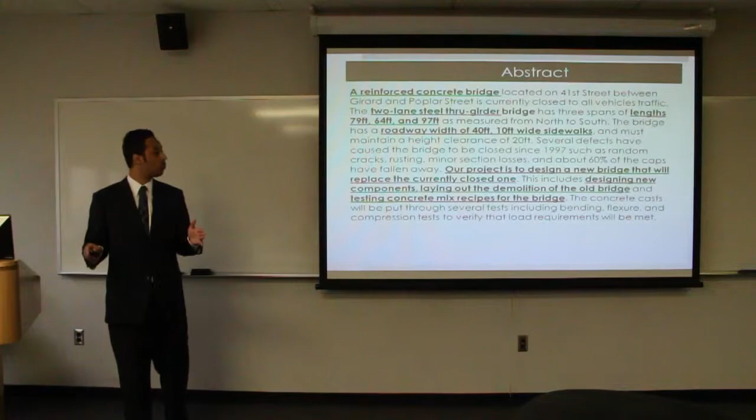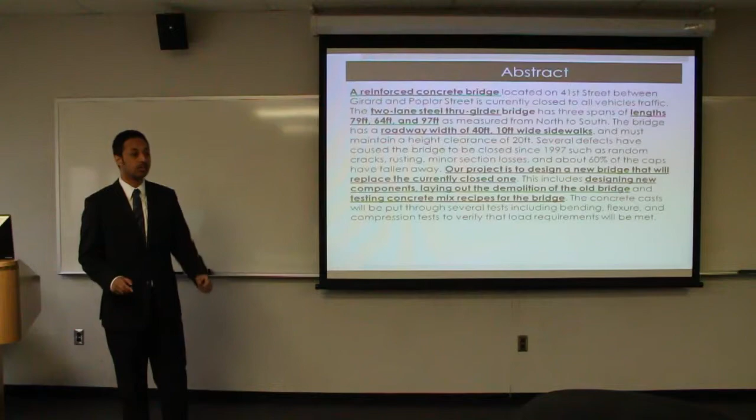The bridge consists of 3 spans, 79 feet, 64 feet, and 97 feet as measured from north to south. The roadway width is 40 feet with 10 feet at each side as sidewalks, and the vertical clearance is 20 feet.

Our overall objective is to prepare a complete design that will be used to replace the current bridge. The design will include designing the different parts of the bridge, designing a rainfall runoff model, preparing concrete recipes, and testing them to meet the specifications required, and testing our model when we apply the various loads acting on it to see if it can withstand them.

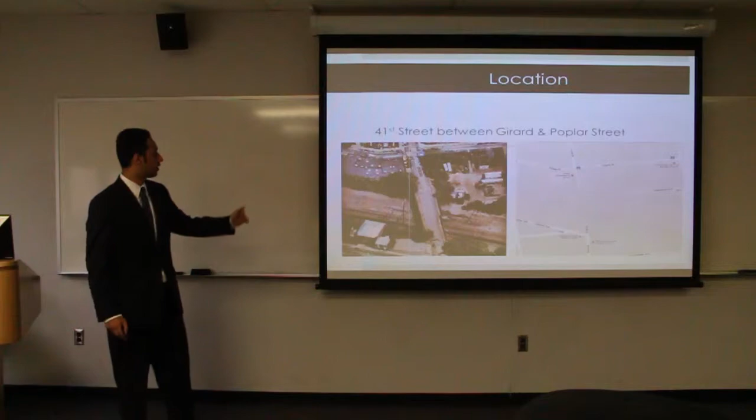And here, as you can see, an overview of our bridge.

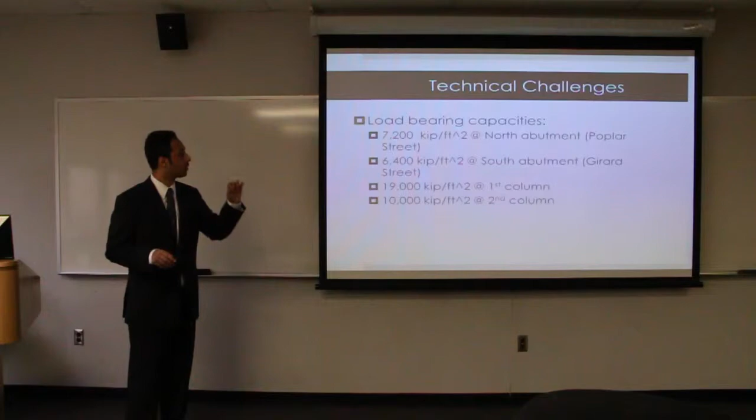Before designing, we had many challenges. One of the most important challenges we faced was the soil load bearing capacity. This is crucial since it indicates the weight of the bridge and the amount of settling of the soil. The current site of the bridge doesn't have any settling, meaning that the soil and the foundation were able to hold the weight of the bridge. So when we were designing our bridge, we had to stay with the same weight properties of the current bridge.

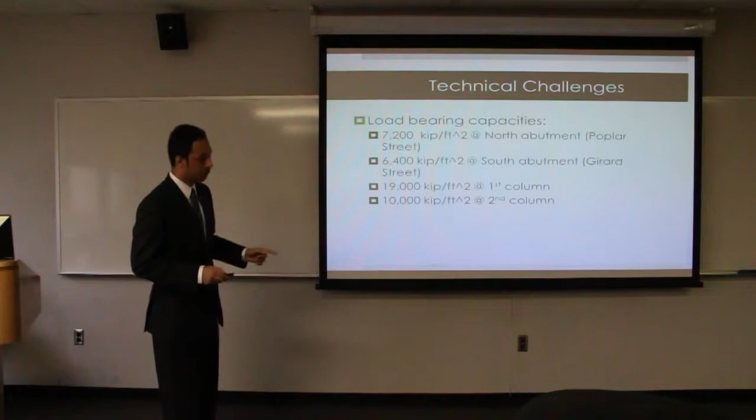As you can see here, these are the capacities at the north abutment, south abutment, first column and second column. One more technical challenge we have to face is to communicate with different companies, as there are utilities running down the bridge — companies such as Philadelphia Gas Works, Philadelphia Water Department, Philadelphia Electric Company, SEPTA, Amtrak, and PECO. For SEPTA and Amtrak, we'll ask them to detour their railroad which runs under the bridge, and for the rest of the companies, we might ask them to shut down their services just during the construction phase for safety purposes.

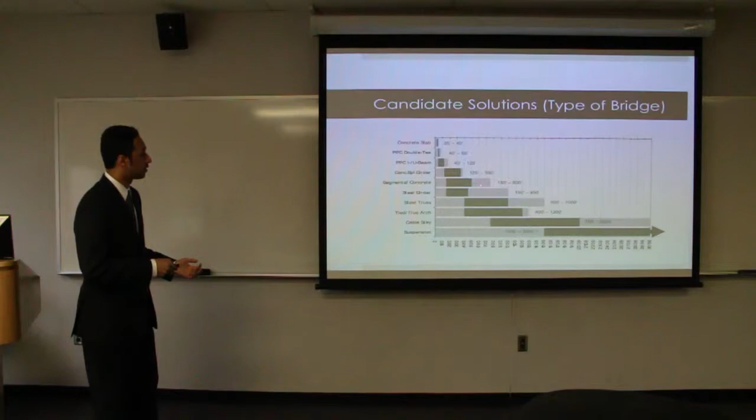When we started designing, we had to decide 2 things: the type of our bridge and the construction method. As you can see here, this figure shows the different bridge types depending on the horizontal length of the bridge. As our project is 240 feet long, our bridge falls between a girder type of bridge and a segmental bridge, as girder ranges from 125 feet to 350 feet, and segmental ranges from 150 feet to 500 feet. Here's a comparison between girder and segmental types of bridges.

Girder bridges are simply bridges that have girders on top of the abutment and the piers with slabs that cover the entire surface, while segmental bridges are made from small sections. Each section is constructed at a time, and when completed they form a whole bridge.

Comparing advantages between girder and segmental: girder can be made using concrete or steel, components can be fabricated, slabs can be replaced without much difficulty, and design can be easily modified. The problem with this type of bridge is that if long spans are used, deep sections will be needed. For segmental, it has high durability, stands for many years before needing extensive maintenance, and it's optimal for bridges with long spans.

For our construction methods, we had to compare between two methods: precast concrete and on-site concrete. With precast concrete, the parts will be constructed in a plant and transported to the site, while with on-site casting, the concrete will be mixed and proportioned off-site and transported to the site by cement trucks.

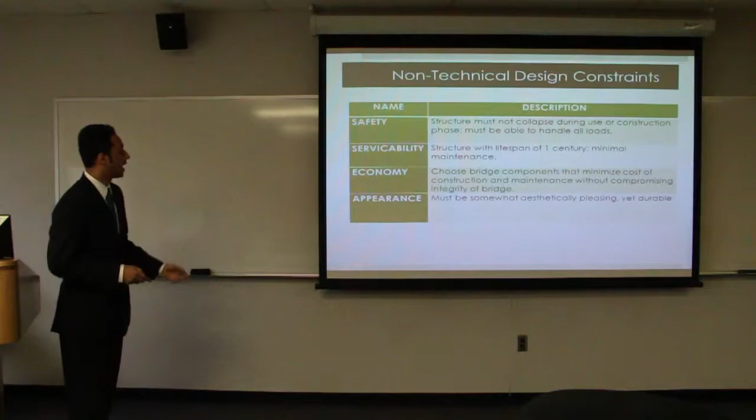Here are our non-technical design constraints: safety, serviceability, economy, and appearance. In designing, we have to consider the span length to depth ratio, as it helps us control the deflection.

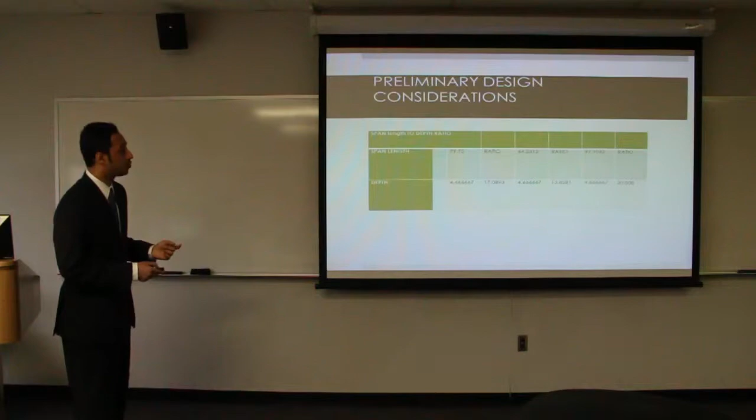Here is our bridge design deck. There are 3 types of reinforced concrete bridge decks: solid slab, void slab, and beam and slab. For our design, we're going to use void slab and beam and slab.

Here is the design of reinforcement. We have the compressive strength, which is 4,000 psi, and yield strength, which is 60,000 psi. We got the dead load, live load, and wind load from our STAAD.Pro analysis.

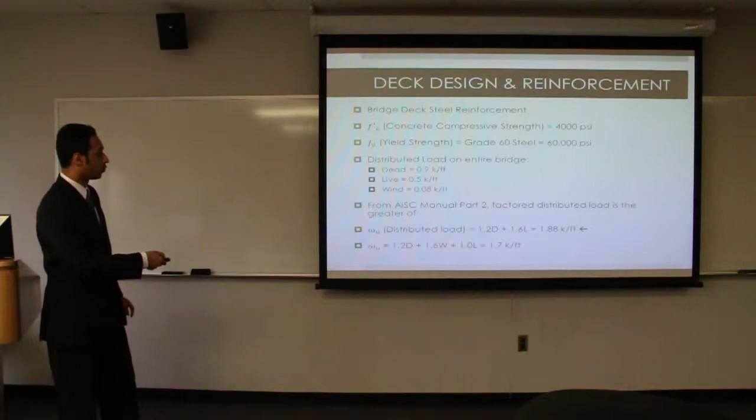Here is the distributed load formula from the AISC. First, we used the formula with dead load and live load, and we got 1.88 kips per feet. Then for the second equation, we added wind load, and we got 1.7.

For the first span, we have here the formula of the factored design moment. We pretty much have all the variables we need: this is length, and this is the factored load, and we got that number over there.

Here we have this equation with all the variables from the previous calculations, including the resistance factor, which was 0.9, and we're left with BD squared equal to almost 22,000.

So we tried B to be 20 inches, and that gives us D of 33 inches. Then we got the area of steel, which is 11.22 square inches. So we tried 3 number 18 bars with an area of steel of 12, and a beam width of 15.4 inches.

Then we check. In design, it's usually assume, try, then check. In our calculations, we didn't get this design the first time — we had to try and check if it would work or not.

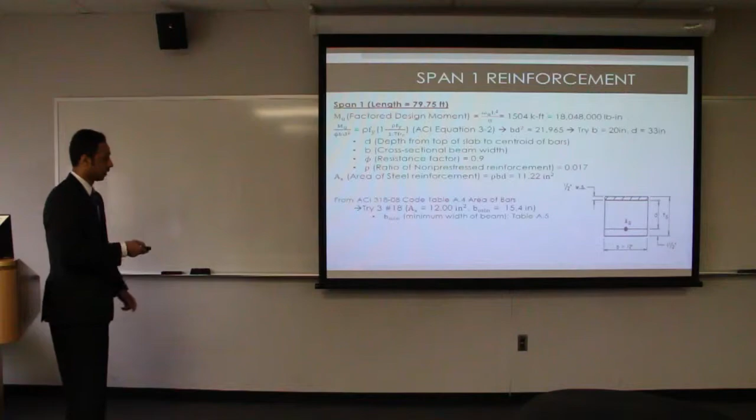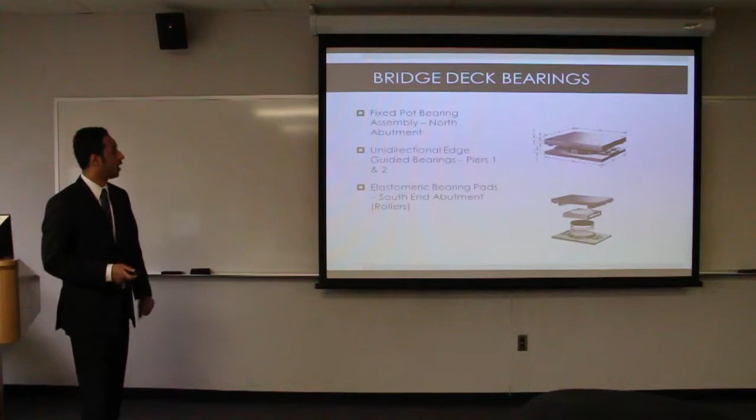The same thing applies to span 2 and span 3, using the same formulas. For bearings, bridges are not static, so parts of the bridge can move as the temperature goes up or down. To control that movement, because it causes many problems if not controlled, we use bearings.

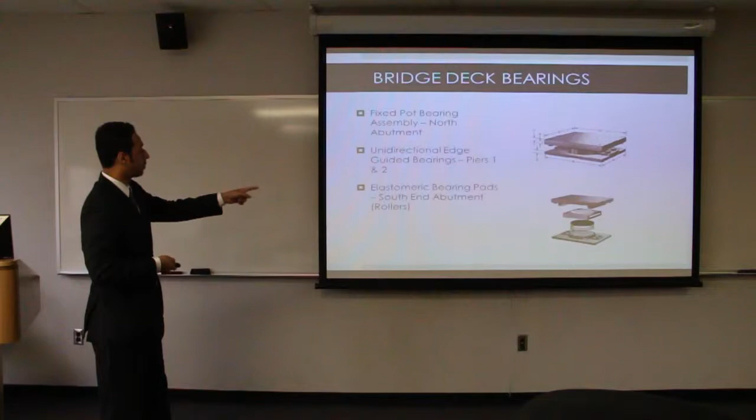There are 2 kinds of bearings: fixed bearings and expansion bearings. Fixed bearing holds the members in place, and expansion bearing allows or permits some movement. Here we're using a fixed pot bearing for the north abutment, guided bearing for piers 1 and 2, and elastomeric bearing for the south abutment.

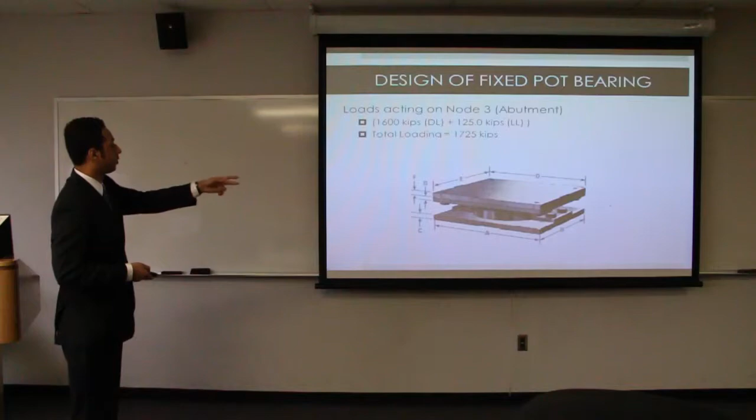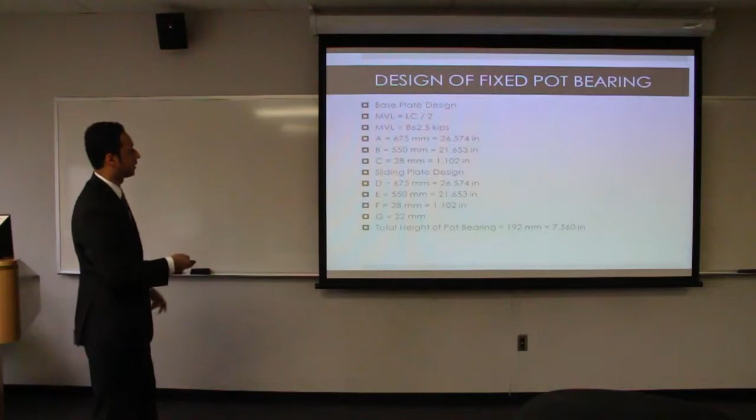Here we have the design of the bearings. We have the load, which we get from our STAAD.Pro analysis, and here we have the maximum vertical load, which is the forces divided by 2, and then we had all these dimensions here, as you can see, A, B, C, and also for this sliding plate. Also here for guided bearings, it's the same kind of process, and also for the elastomeric bearing.

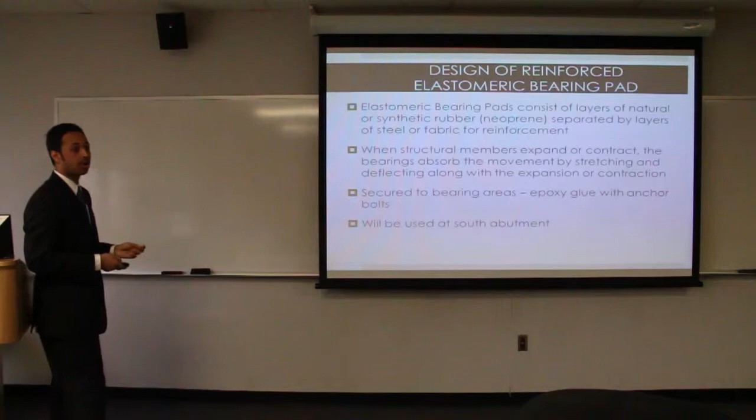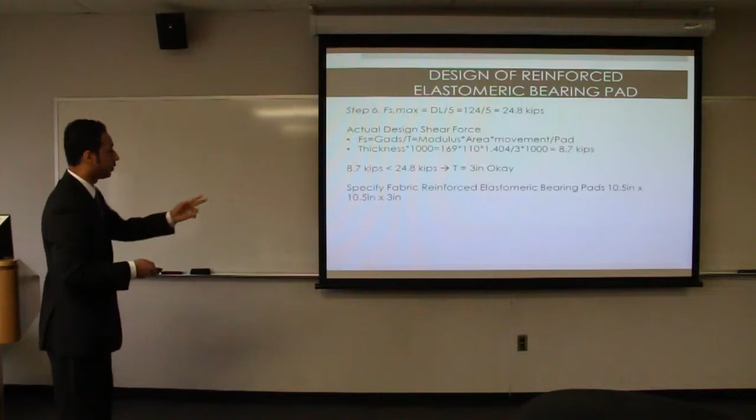We went through 6 steps to design our elastomeric bearing, and we got 10.5 inches by 10.5 by 3 inches.

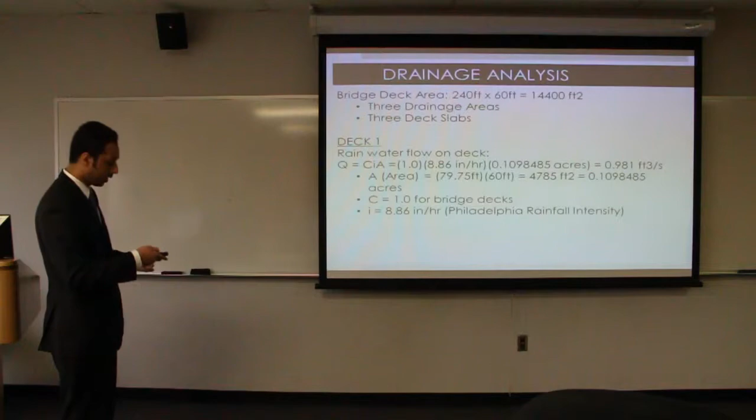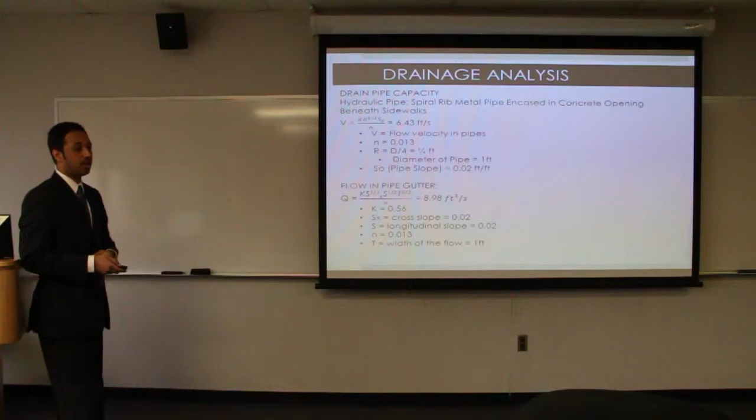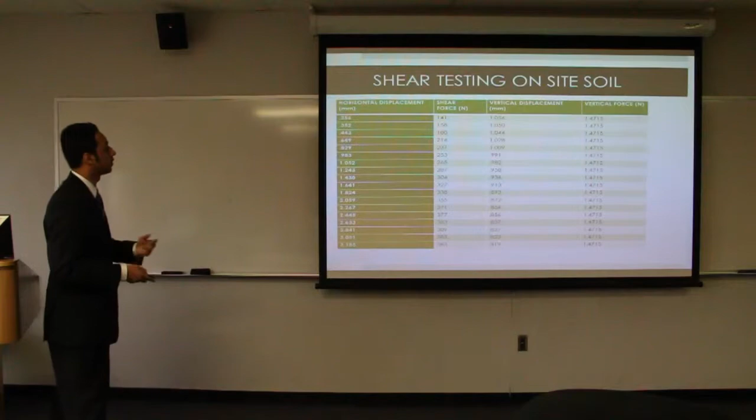Here's our drainage analysis. We used the rational formula for the 3 decks, and we got the grate inlet drainage and pipe inlet, which was greater than the flow rate, so our design passed. And here is the soil test, as we talked about it, that there was no settling, so it was okay.

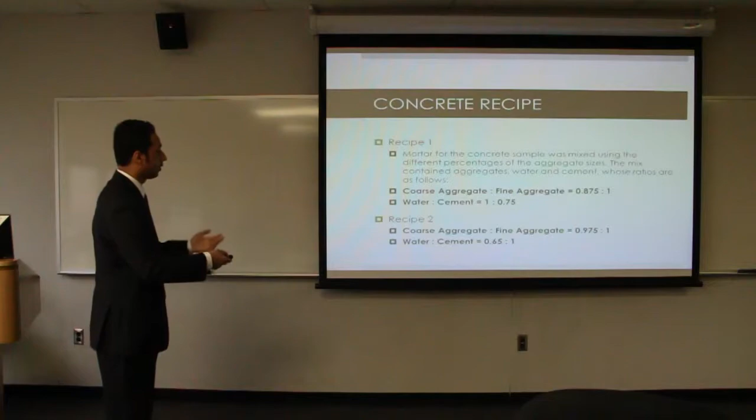We created two recipes with two different ratios, coarse aggregate to fine aggregate ratio and water to cement ratio. We did a 3-day test for the first recipe, and it didn't pass as it was less than 4,000 psi. For the second recipe, we did a 28-day test, and the compressive strength was over 4,000, so it passed.

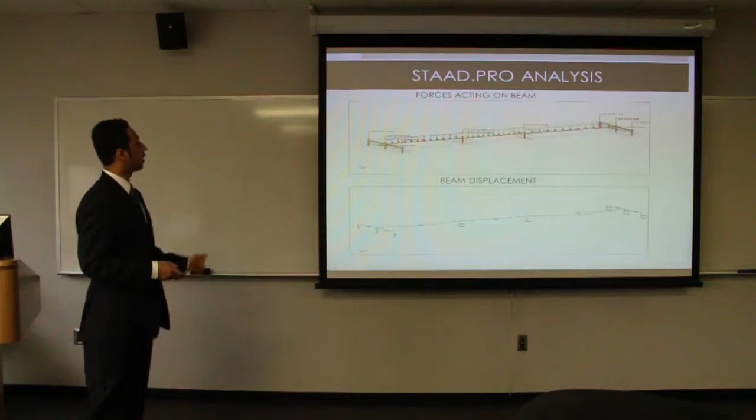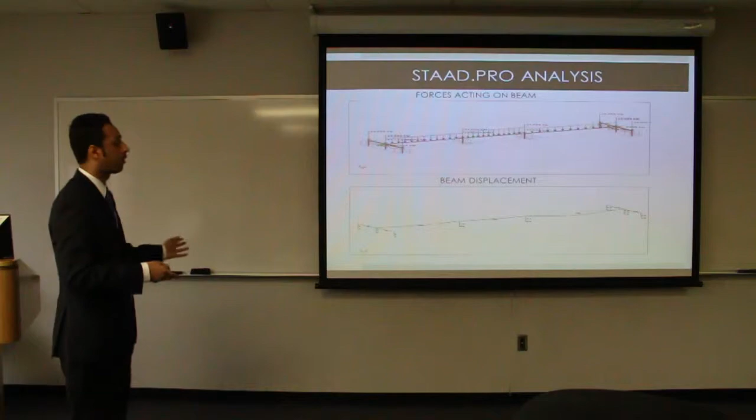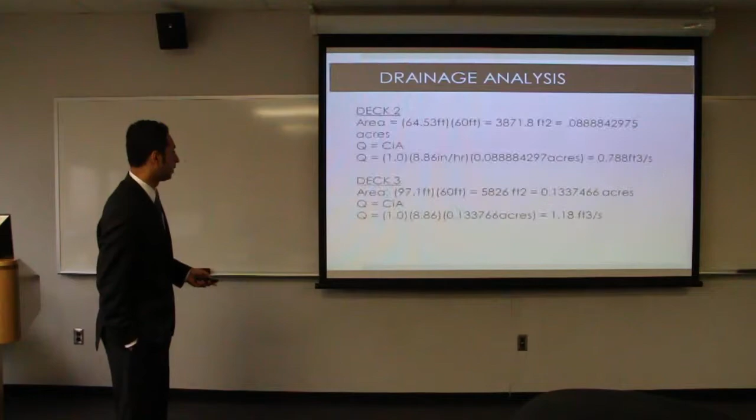Questions? Could you go back to the slide where you showed the allowable load on the beam? I think it was 3 tons. It was at the beginning somewhere, in the constraints. Now, it says maximum vehicle load of 3 tons.

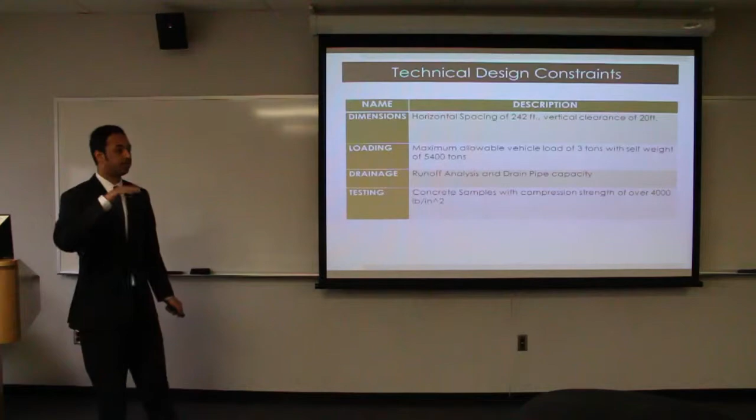That means the heaviest vehicle that can go on the bridge weighs 3 tons. No, it's the peak load of the vehicle on top of the bridge, that's what the city of Philadelphia has specified, that the bridge should withstand the peak of vehicles on top. Yeah, but you're saying the vehicle weighs 3 tons. I'm sorry, it's not the vehicle, it's the total vehicle weight. What I'm thinking is that's the weight they put on a bridge that is in bad condition. It's a limit, a load limit on a bridge, 3 tons for any vehicle. The city of Philadelphia has specified a limit to the load on top of the bridges. Okay, just wanted to verify. Yeah, that's fine. Other questions?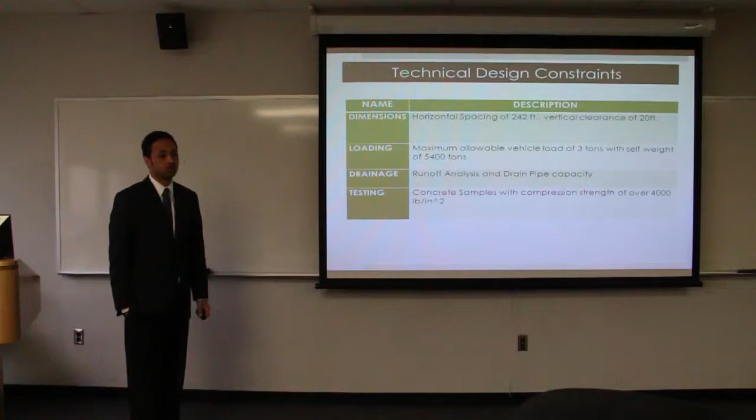When you were talking about cast on site versus precast, why would anybody ever use cast on site? Looking at your assessment, is there any reason you would ever cast on site? The way we created this slide is a comparison between precast and on-site casting, not all the advantages of on-site casting. We just compared each method's advantages against the other, not showing all advantages of both methods.

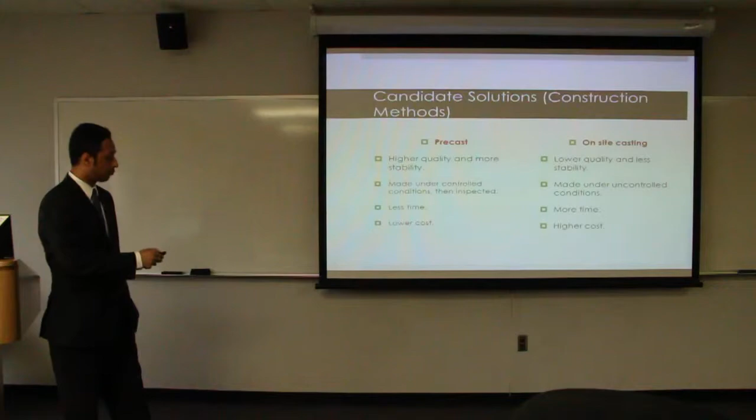But can you give me an example of when you might choose on-site casting? Probably if shortening the time isn't necessary, and for larger bridges, since precast concrete takes less time and is better suited for smaller spans. On-site casting concrete is better for large bridges. Because if you want to create components of a very large bridge, no one would do it in a plant, so it should be created on-site.

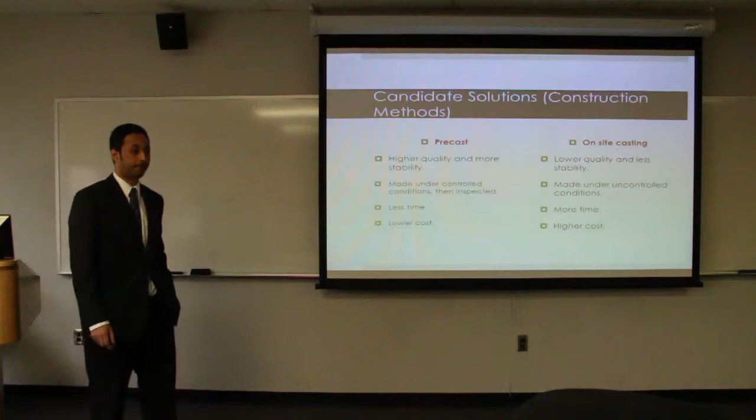And one other question on the slabs, since you talked about a void slab and a beam slab. There are three types: solid, voided, and beam and slab. Can you explain the difference between those three? In our design, we only used voided and beam, since we got the advantage. So why did you not use solid?

I think because our depth is not that big, so solid wasn't suitable. Solid slabs would be for greater depth of the slabs. And what exactly is a voided slab?

In our design document, we showed the difference between the different figures of them. The voided slab was like circles all along the deck, it was voided. I wish I could show you a picture from our design document, because the three types were there, the figures of the three slabs. Any other questions?